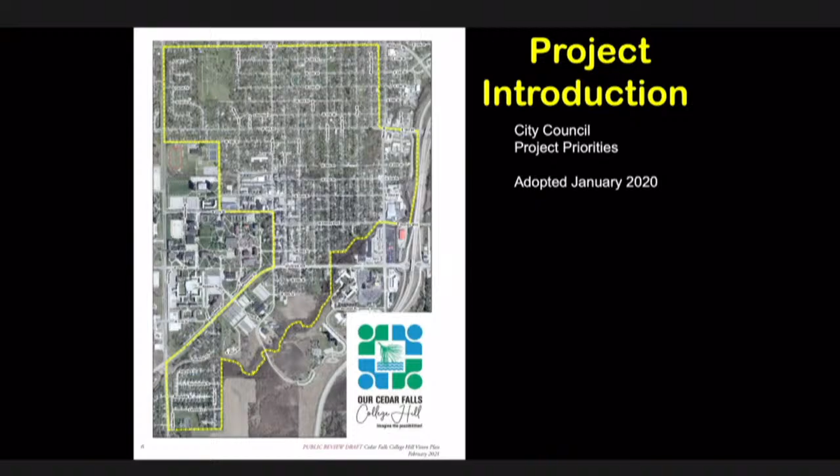One thing I want to highlight: the study area here is outlined in yellow. It is a larger area than most people probably think of as College Hill. It goes as far north as 12th Street, and south of University. It wraps around the east sides of campus, and goes over as far as the highway and the Cedar River bicycle trail, picking up a little section of the Main Street corridor. On the northern boundary, it abuts the area included in the downtown vision plan, so that gives you an idea of the relationship between the two areas.

We're going to walk through the plan to make sure you know how it's organized and what some of the major concepts are. I want to highlight that this is a long-range vision plan. The timeline is going to depend on the local economy. There are a lot of ideas in here, and many of them are going to depend on private property owners taking initiative. The city is not going to require people to undertake any of these activities. So depending on the economy and on private property owners' choices, the timeline and exact sequence that some of these activities might come to fruition really depends on individual choices.

What's in this plan? There's an executive summary, an introduction to the overall process, background analysis, what we did during the charrette last fall, then moving forward, what the vision for the area is, the next steps for the short term, and then an appendix with a lot of the raw information that was produced during the course of the project.

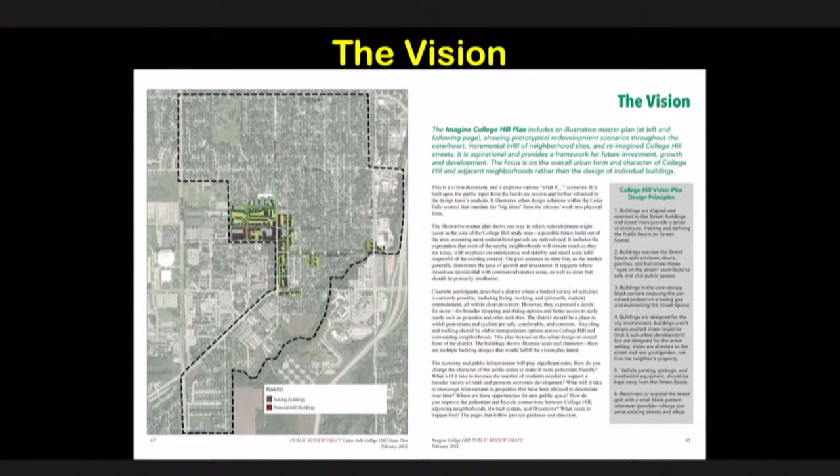Everybody, I would say, what's there is cool. People were saying continue the city's efforts to stabilize it. And as Mary mentioned, some people talked about giving our street trees a little bit of help. But the big idea for the vast majority of the study area is not to change it, but enhance it.

Now zooming into the area around the university, which is where the idea of more intense building and change would happen. You see there's a lot going on in the illustrative plan.

First, the dark gray, charcoal colored buildings are all existing. The reddish brown buildings are illustrative buildings showing an idea about how new buildings could go in to kind of fill out the missing teeth.

You notice all the numbers on the plan. Those all refer to a set of illustrative drawings that we're going to show you next, except for number 9, which is identifying the university.

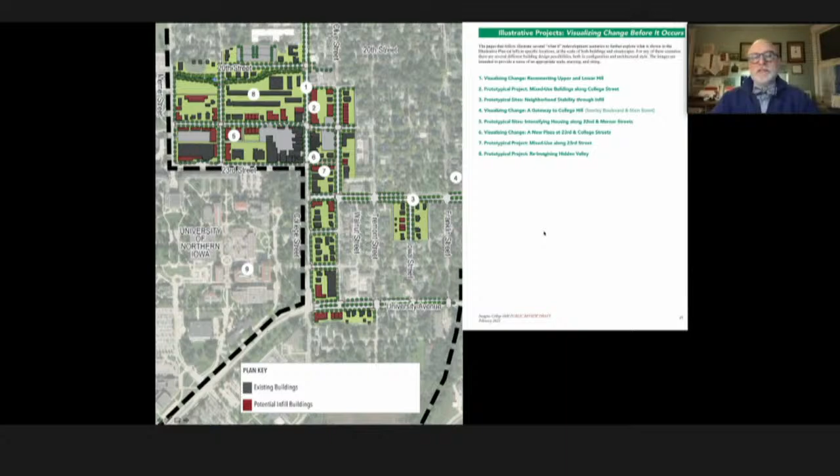Our team did a series of drawings illustrating some prototypical projects that really could go anywhere, they're examples, and others that are really specific to one place. You could think of these as what ifs.

The first is a prototypical project for the stabilize and enhance areas. We picked a couple of lots, one the standard 66, the other a little bit wider, to show what could be built on it. These are ideas about what could be built throughout.

A couple of things to notice. One, the parking is in back, not in front. That's very specific. For this example, they've got an alley, and that's great when you have it. But I'll emphasize again, the garage doors are not on the front of the building. Instead, we're talking about front porches.

The two examples are houses. The one closer to Seerley Boulevard is a single house. It may have an accessory dwelling unit in back on top of the garage. The other one, farther away from Seerley, is a 2-unit house, which may also have accessory dwelling units. The idea is that they're fitting into the best traditions of the houses in that area, so new construction, we're thinking this would be a good model.

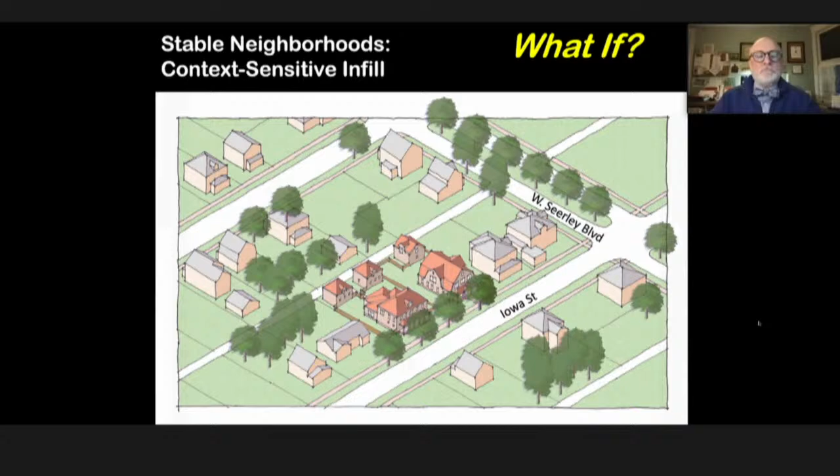Now that gateway area at Main and Seerley. This is a proposal in two steps. The first is to improve the pedestrian and bicycle connections. For bicycles, this is really a key point to get from the neighborhood over and link up to the city's trail system. A lot of people talked about that.

The second iteration shows how these buildings on that corner could be redeveloped. I would point out that there's an idea that these new, larger buildings could be about the same use they are now. That building on the far corner across Main Street is showing a building that includes a gas station, with the pumps in back. So it could be similar uses, but a very different form.

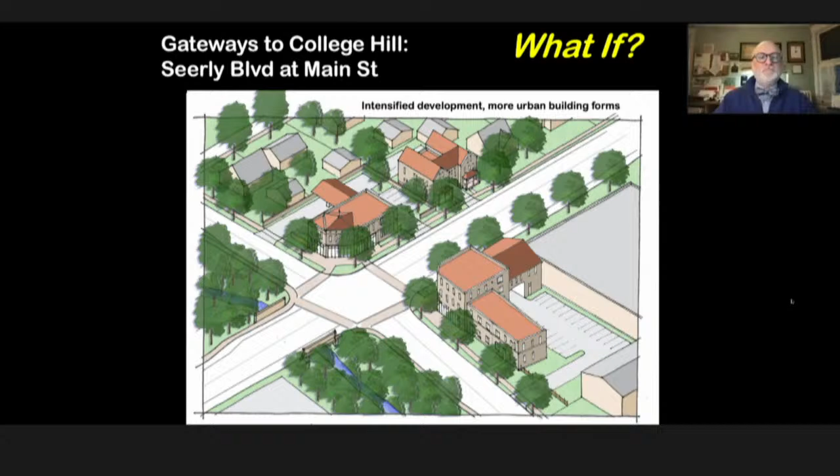And next, that idea talked about reconnecting the upper and lower hill. If you look, the close street is College Street. On the far right of College Street, you see the end of Upper Hill, farther away from the creek, with the shops, kind of a storefront street.

Anyway, let's move on to the transformation. As you can see, these are 3 or 4-story mixed use buildings, shown in two distinct buildings. One corresponds to the Bonnie's lot properties and the other corresponds to another set of properties.

There's more detail on these, and the people designing them were dealing with the topo and the parking, tuck under parking, et cetera. But it's an example of the kind of redevelopment that's possible with some tweaks. You can imagine on that side of the street, it's a completely connected pedestrian experience walking in front of storefronts and restaurants from 22nd to 21st.

There's an idea that with some combination of public investment, the government changing its rules, and the private sector investing and building on that - it's a partnership.

And you start to do things like improving the streetscape, improving the pedestrian crossings, and adding private sector development. The first building I want to point out is there's a sign on that corner that says Bonnie's. There's an idea that this Bonnie's could move in and have the store on the ground floor and apartments or condominiums above, with parking in back. And it becomes an area that kind of starts to snowball into a really attractive place.

One thought here, you can imagine there's one more transformation: get that last building in on the far right corner. Imagine a prospective UNI student's family coming to College Hill and seeing a scene like this instead of a scene like that.

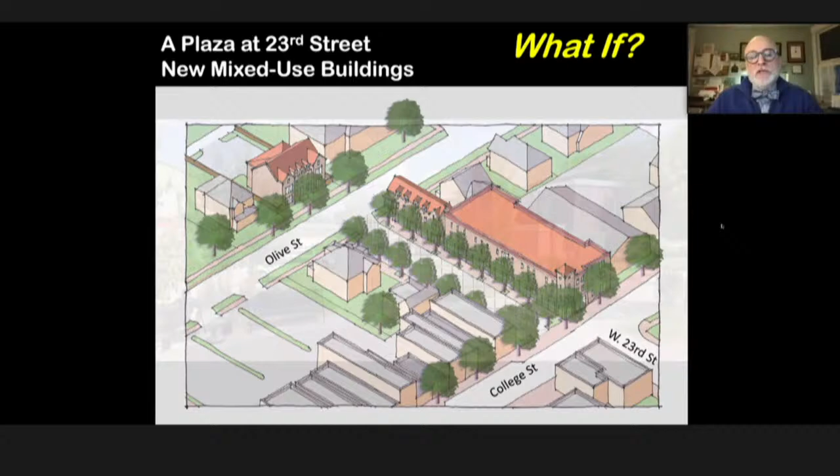This has you on the ground looking across College. Actually, you're probably standing in the middle of College Street and 23rd, looking down what's now a parking area. This is as is today - you might have snow on it now, but the first step, like a lot of this work, is a combination of the public sector doing things and the private sector teaming up. The first is to start to improve the look of the place: a paving pattern, which could even be painted, could be different pavers, but could also be painted. Starting to plant real street trees, along with just the city being committed to making this change.

Then the next step, it's an opportunity for private sector, or actually on the near right, university redevelopment. At the end, looking down this plaza, there's a private lot that we're showing as redevelopment with a small apartment building to take advantage of this extra value in the frontage.

And then another layer of investment, more streetscape. And you can start to see - this is right now, this is during the week, this might be the nicest parking lot in the state. And then special events, on the weekend, you close it off and it becomes a festival, a farmer's market.

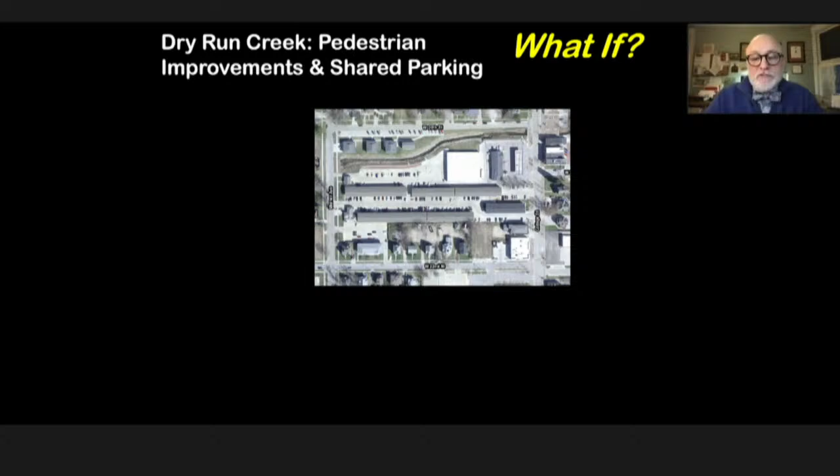First thing to notice: the city has done quite a bit of work improving Dry Run Creek. It's a flood control project mainly, and they have greatly reduced the floodplain. However, there's still a floodplain, and this is an overlay, so there are a lot of properties around it within that floodplain. The medium darker blue is the stream itself, the medium blue is the 100-year flood, and the very light blue is the 500-year flood. So that's a complication for development.

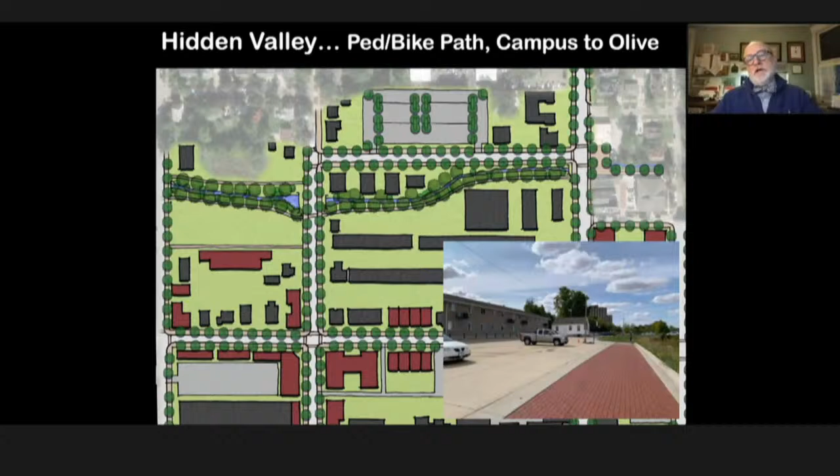This project is really two projects in one. The first is all on the public land, and it's about improving the Dry Run Creek. The flood control improvements are there. What this project calls for is expanding that, turning it into a greenway with trees, improving the path, and also connecting it across College to Peterson Plaza, where the city is currently working on extending the walkway all the way over to Olive. You see that on the drawing.

And adding that section between Campus and Merner on the left. The picture at the lower right shows the brick walkway there. You're standing on College looking back towards Merner and the university. In the distance you can see the tower, the student housing tower. So this well-lit, beautifully treed natural greenway is a great pathway, a great connector between College Street and the university, where now it's kind of ad hoc. We heard people talk about students walking through the fields and suddenly emerging on the other side.

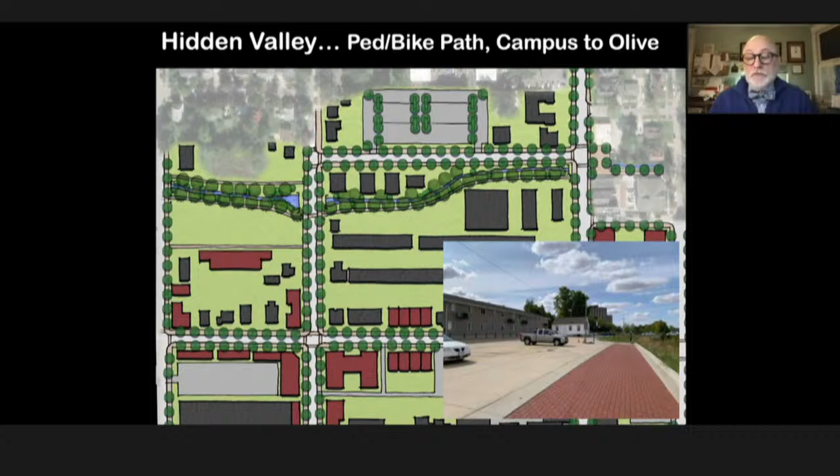So that's a buildup and improvement, a creation taking advantage of Dry Run Creek as an amenity, which it certainly can be. And then the next part of this...

You see there's a parking lot at the very top of that. We're talking about this not as just a parking lot, but as one that's environmentally careful. There's room in there to be planted with bioswales, et cetera, pervious paving, so it is conscious of the environment. This parking would help with the extra development that's going to happen here, take some of the load off of those properties, and be an improvement for all.

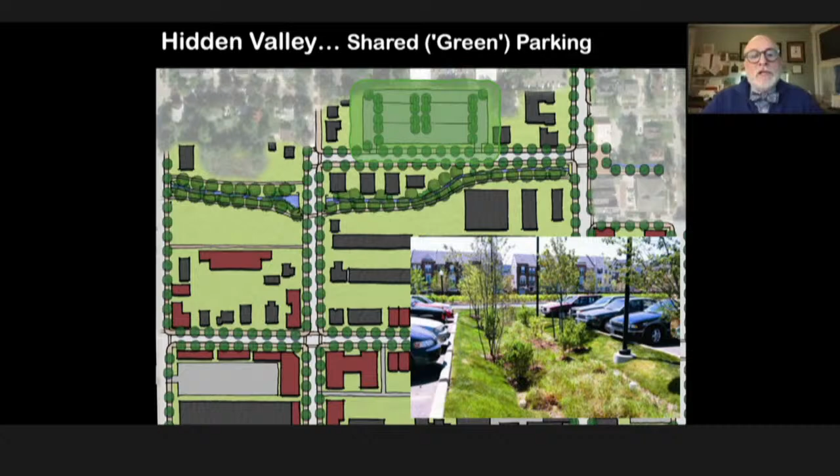And the next part of this is the private sector side, and that is through the combination of changing the rules for development.

There's potential for a big change in this property, this kind of super block. You notice it's now divided into two blocks. That increases the walkability and also makes it possible to have a more positive increase in the intensity of development on this site.

Now, all of those brown buildings, that's all private sector development, and that would depend on the property owners making the decision to make that investment when they think it's time. The basic scheme has...

Parking in the middle creates a kind of street up through the middle that connects. The first part of it is a street to provide automobile access to the center of those two blocks. Then there is a kind of civic green in between the two. This would allow, by the way, it'd be built so that emergency vehicles could drive on it, so it would have good fire and emergency vehicle access. Then along the creek, it finishes off with those buildings facing this widened kind of parkway next to the greenway. So this is a very positive new public area for College Hill and the city.

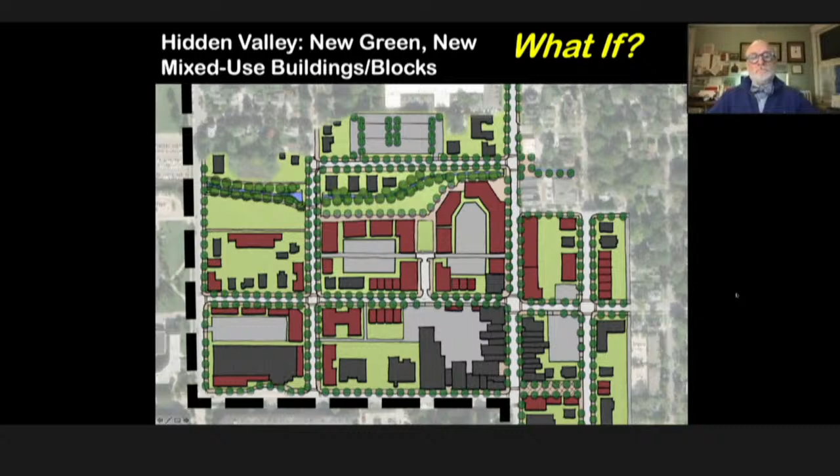All right. And Mary?

Okay, I will not walk through these again. This is just sort of a reminder of those big ideas. Hopefully now that you've seen the visioning and the prototypical projects, you can see how the ideas were captured during that effort.

The next section of the plan is just a high level review of the recommendations overall, and then some next steps that would happen in the near term. That's the wrap up. After this, there is the appendix I mentioned, which includes the full economic report, the input we got from the sessions back last January, as well as the survey results from the UNI students, et cetera. So there's a lot more background information if you want to dive in deeper in the appendix.

A couple of questions we figured people are going to want to ask. We want to let you know, people, when will this plan be adopted? Ideally you all will have the chance to review and discuss, and the goal is that late spring it would actually be adopted. People may want to know, is this going to require me to change my home, my business, my property in any way? The short answer is no. As I said at the beginning, the idea is to set the table, to change rules that would help people if they want to redevelop, but this is not going to require any private property owner to change anything they are currently doing, assuming it is legal today.

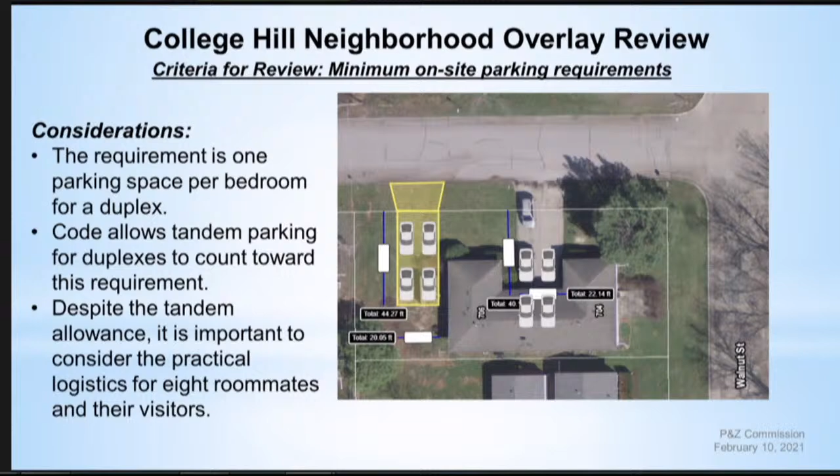Code also requires evaluation of open space and landscaping to consider what should be required as appropriate to the context of the neighborhood. The driveways in the required front yard and side yards are required by code to be no more than 18 feet wide. The recently constructed driveway exceeds this limit. The driveway technically should have gone through a mandatory review and approval by the Planning and Zoning Commission and City Council.

But a recent code review by staff brought this requirement to light. For practical reasons, we will not require the applicant to reduce the width of the brand new driveway. However, there are landscaping requirements to consider. The front and side yards are required to be landscaped with grass, shrubbery, and trees in a manner consistent with the residential neighborhood.

The applicant is required at minimum to replace the grass, but it makes sense for the commission to require that trees and shrubs be used to screen and soften the view of the new paved area. Some of that is also just required by code.

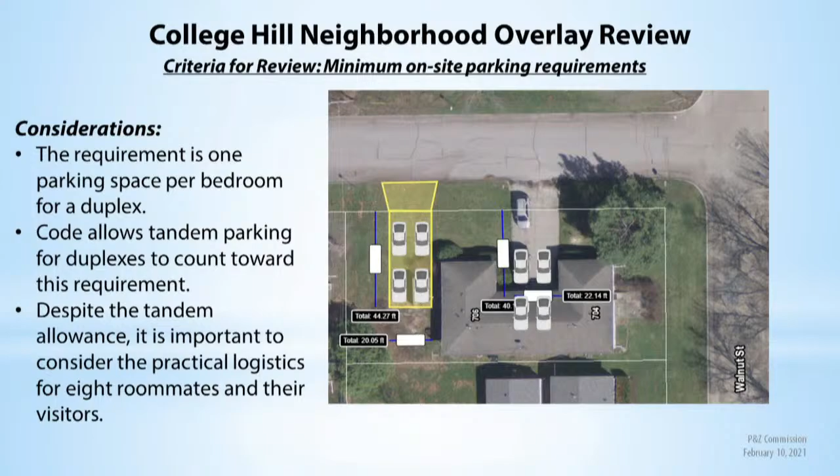Other questions for staff? Okay, at this time we're going to open it up to the applicant. I think we have a couple of public. We want to open it to the applicant first. Does the applicant have any comments?

Wes, I'm going to activate you. Can you hear me? Yes. Name and address, please, Wes. My home address or the address of the? It's home. Home, please. Oh, 5373 South Hudson Road, Cedar Falls, Iowa. That it? Yep. All right.

So it was mentioned in the review that places closer to campus might be wanted for higher density, which this duplex is within 1 block of campus, which is kind of proven by the fact that the complaint, I don't know if you guys saw the complaint at the very bottom of the packet, was about parking in Melanie Griffiths in front of her house, which is at 514 West 28th Street, which is a full block farther east.

Students park far away just to walk to campus, meaning the duplex is quite close, within a block. Also, regarding the logistics of parking, I don't think the parking in front of her house would be caused by the tenants at my duplex, because I have tandem parking. Chris said it wasn't logistically practical that they'd park tandem, but if the street is filled all the way to 514 West 28th Street, a block further east, I'm guessing my tenants would just park tandem instead of walking a block and a half to their apartment, dealing with talking to each other and getting people out who are parked in front of others.